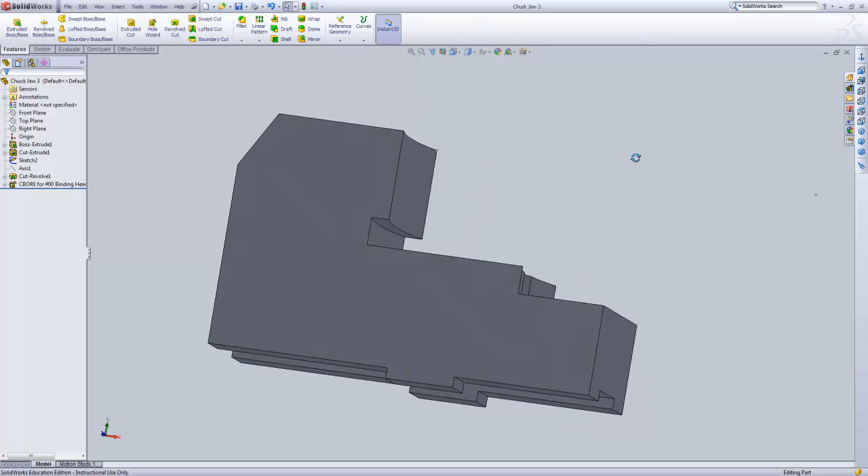This project is the chuck jaw. The chuck jaw has first an outline to extrude, and then a cut on the bottom, two holes, but also these cuts are curved. That's due to its inclusion in an assembly of a chuck.

The most important aspect of a chuck is the axis that it's going to rotate about. That's shown in the diagram by the axis on the far right that has a 4.5-inch radius to it. So that's going to be the trickiest part of what we need to do.

So we will go to a new part and make sure that it is in inches. So we'll go to inch pound second, and we'll make sure that we change it to 3 decimal places.

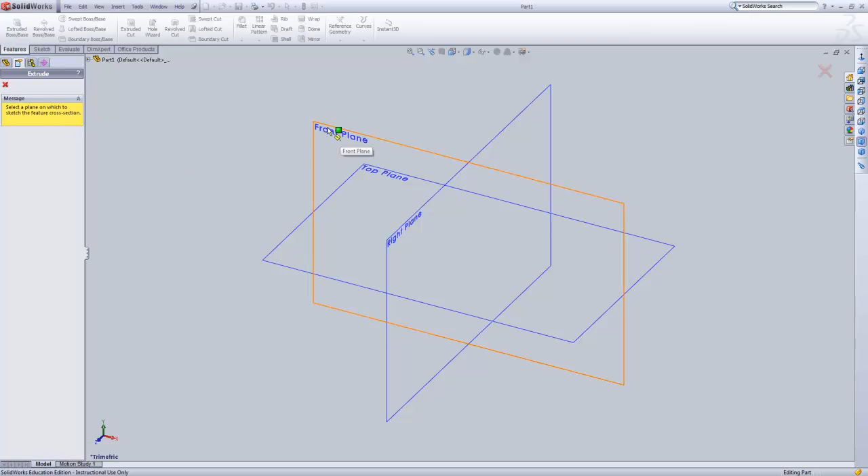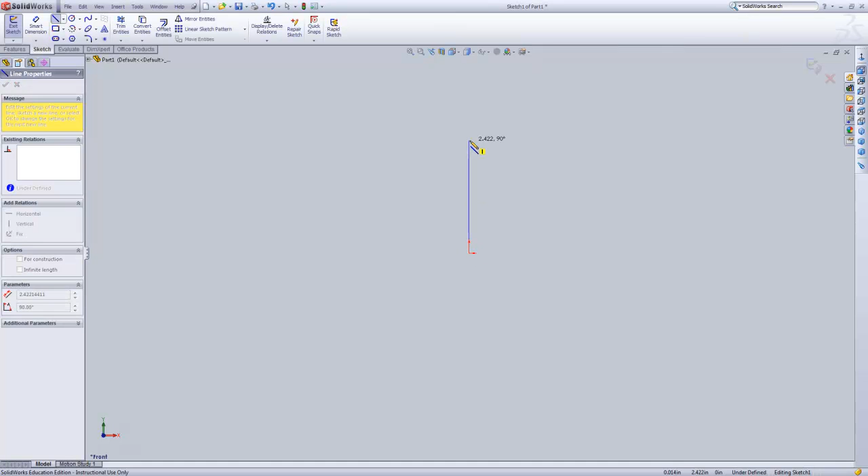So the first thing we're going to do is make the overall block outline. Going to extrude on the front plane, and notice that it is also symmetric, so we're going to use a mid-plane extrusion. I'm going to keep the origin in the lower left, and go up here, over. I'm going to make an overall block so it's easier to see how the cut happens.

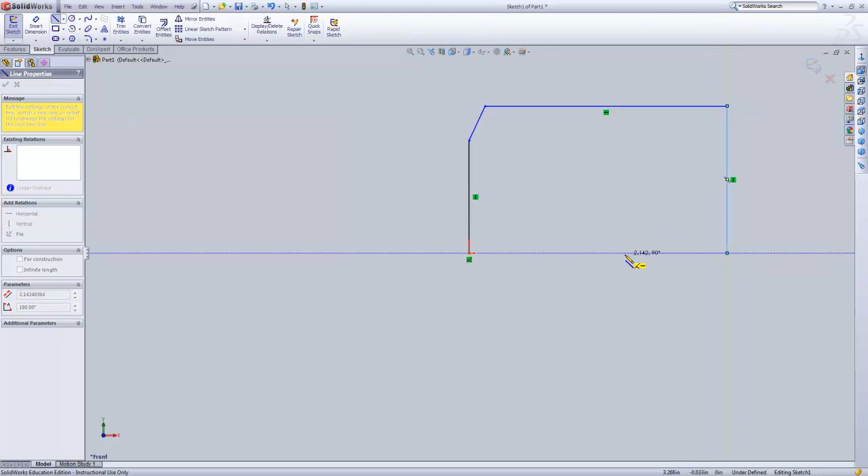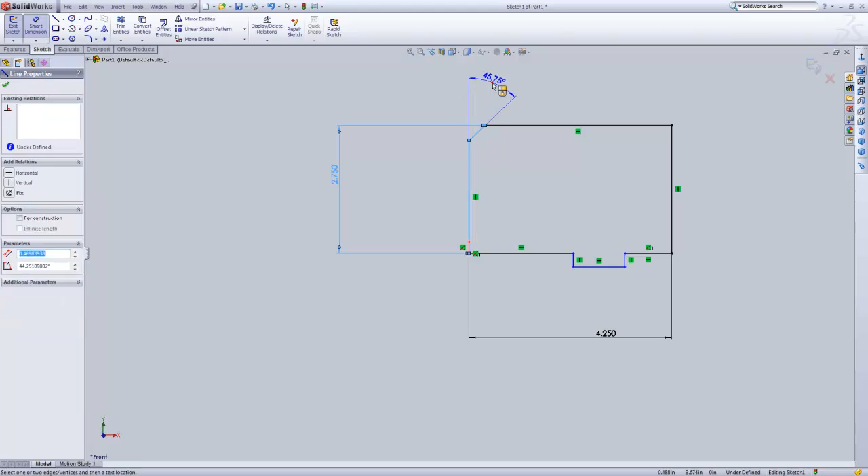Then this just needs to be dimensioned. Give the overall bottom, overall side. That looks 30. And height given is 0.62.

This detail here, I'm going to put 0.75. Oops. Actually it has a tolerance on it to be just under 0.75, so 748. And this is...

Well, now where is this located? Now if we can drag this back and forth, we're going to need to make sure that we have that dimension. That's 1.5 from the right side.

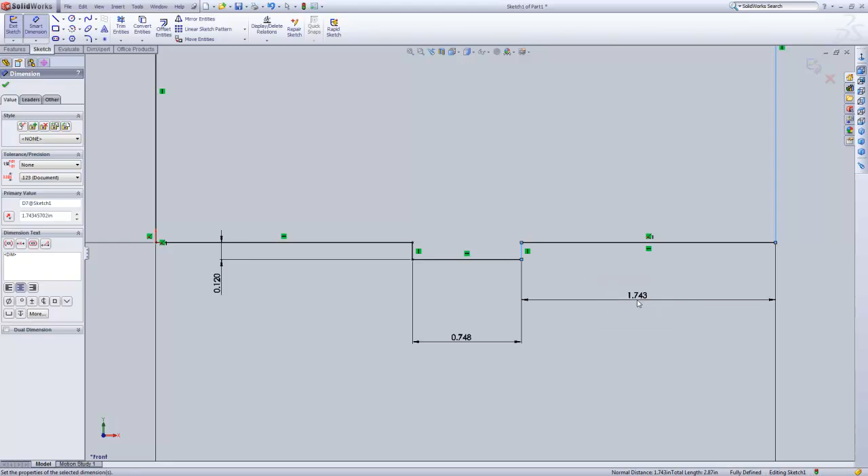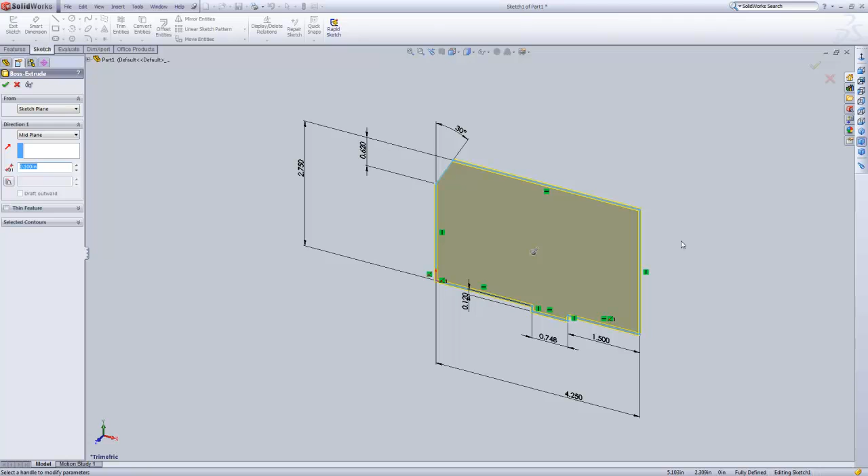And our outline is complete. Again, it's a symmetric part, so we want to use, instead of blind, a mid-plane extrusion. That allows us to extrude on either side of the intended plane. And the overall depth is 1.7. And there's our first block.

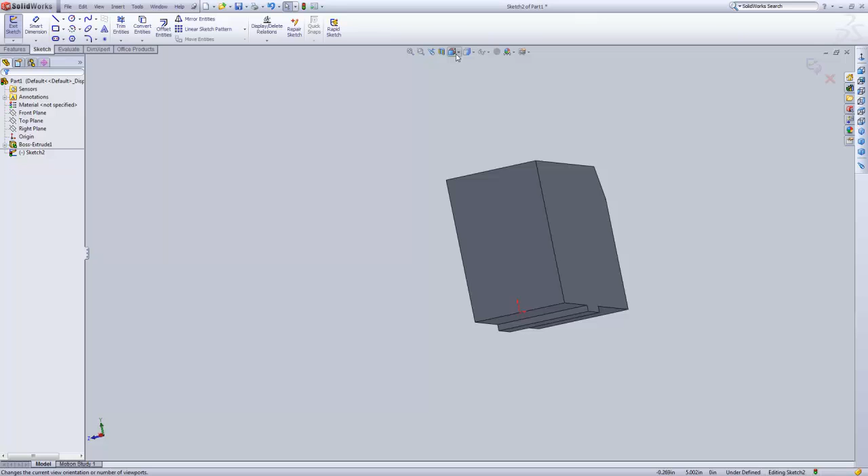Next thing to do is to cut the slot in the bottom. Extruded cut off of that plane. Look at it head on.

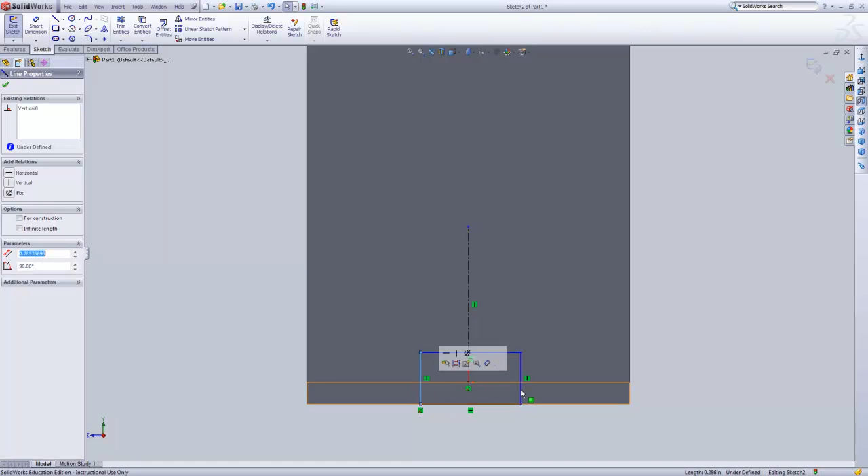I'm going to make sure it's symmetric by putting in a center line, a line to the origin right here. So now, after escaping from that, hold the control key down, hold both sides, hold the center line, click on symmetric, and now these lines will always be symmetric about the center.

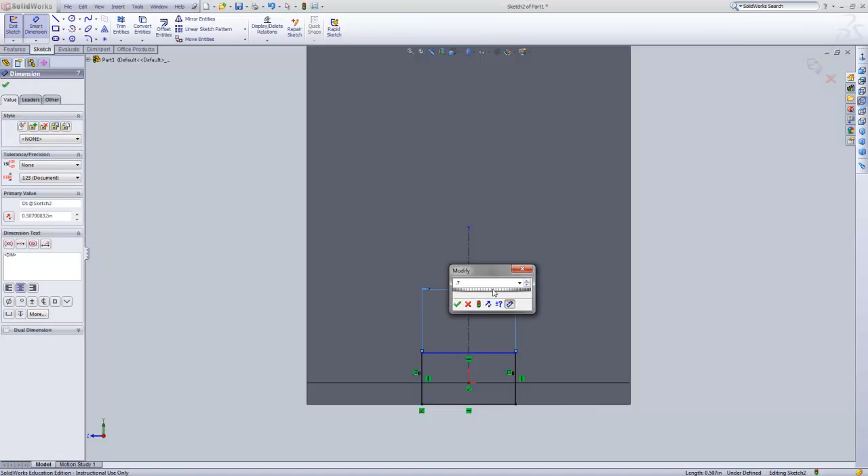I just need to dimension. .752. And then a vertical dimension, actually from the top of the cut to the edge, shown there, 120 thousandths.

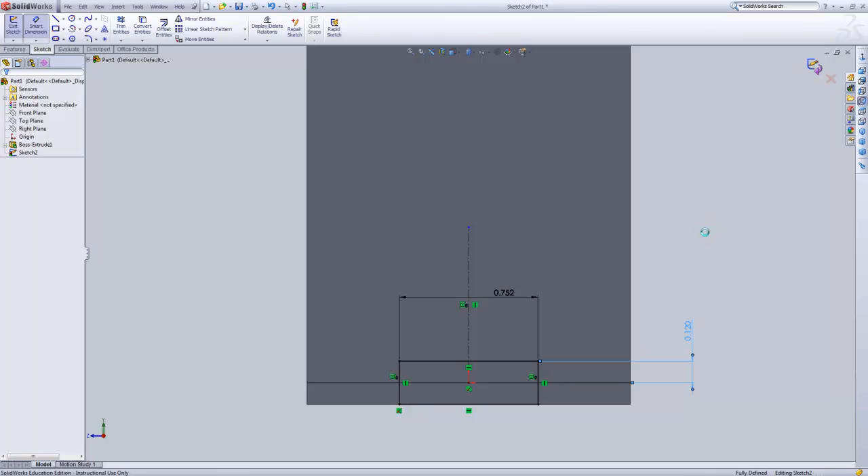That does it there, and we're going to go all the way through. And there's our slot.

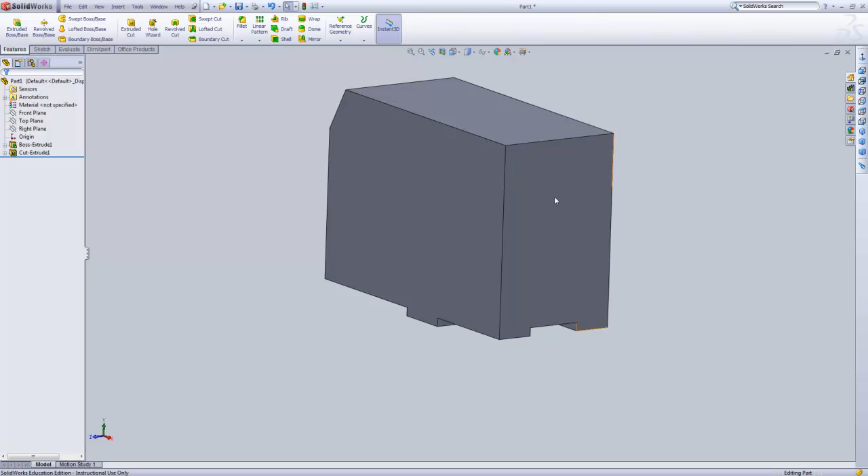Now the next couple of features are going to be used to set up the cut that has the curves in it. The very top of the diagram, you see that there is a 1.75 inch dimension from this face over to a point right about here.

From there, we have a 4.5 inch radius to some axis out in the middle of nowhere, but that axis is on the middle plane. Again, symmetry is very important.

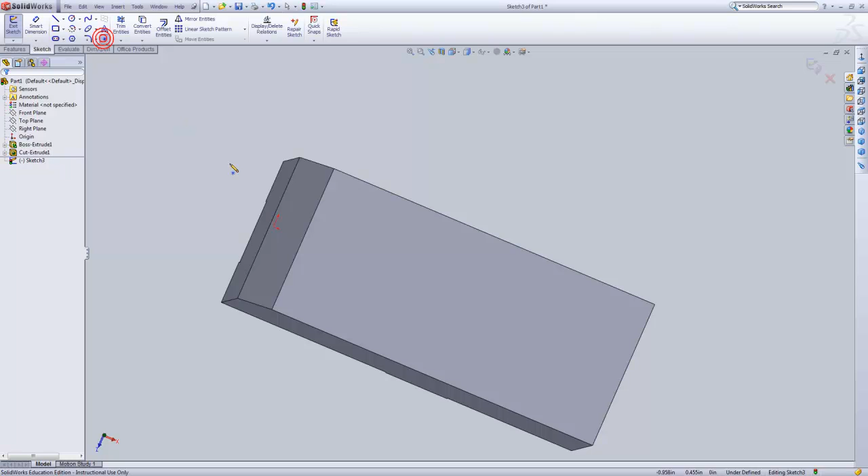So what I'm going to do is I'm going to just create a sketch. You go in sketch mode, put this plane, and I'm going to simply make a point. I'm going to put this point right here, on that edge, and then I'm going to dimension from that edge to here, 1.75.

Then I'm going to make another point, and we'll put that point out in space over here. I'm going to hold the control key down, that point selected, and I want to make sure that that point is aligned with the front plane. Escape out of point making. There, I'm going to select the point, align it with the front plane, make sure it's coincident, so now I know it's always going to be on that middle plane there.

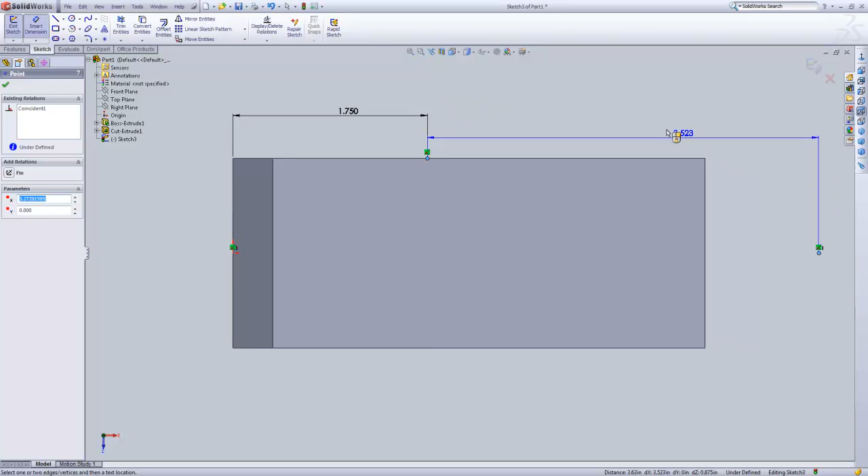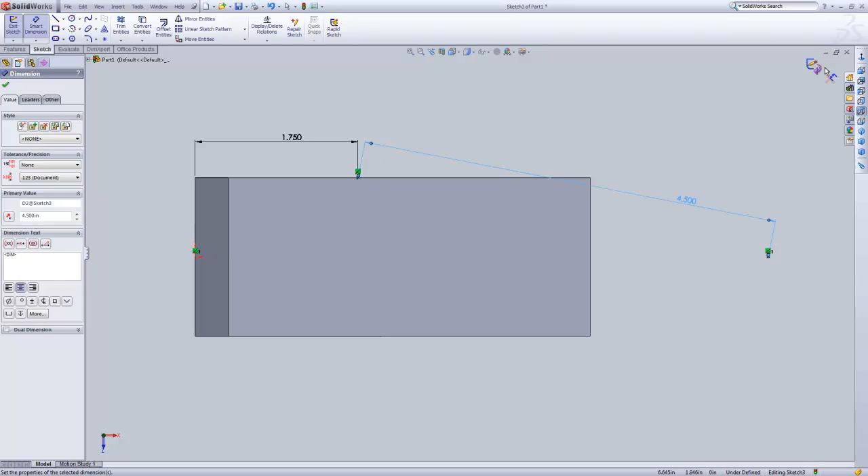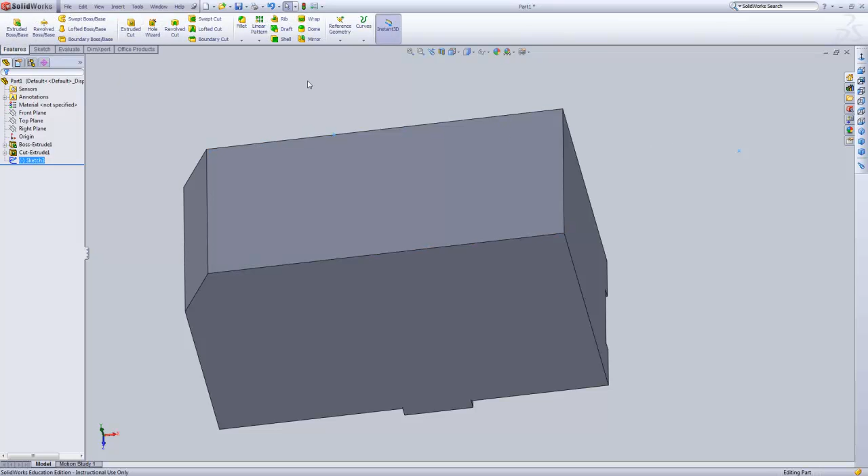Now this axis of rotation in a lathe or a drill or whatever, something that requires a chuck to keep it on the axis. That axis is so important, I'm going to create a brand new axis right here so that it can be used for whoever is going to assemble these parts.

I'm going to go reference geometry, axis, and I need to select various features, whether it's in sketches or edges or whatever, and to define this, I'm going to make sure it's in the front plane. Now it doesn't know exactly where it is. It could be anywhere in that front plane.

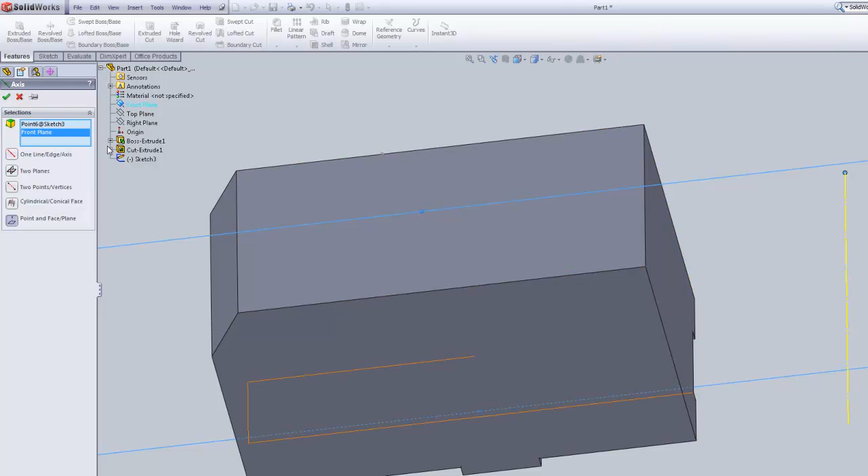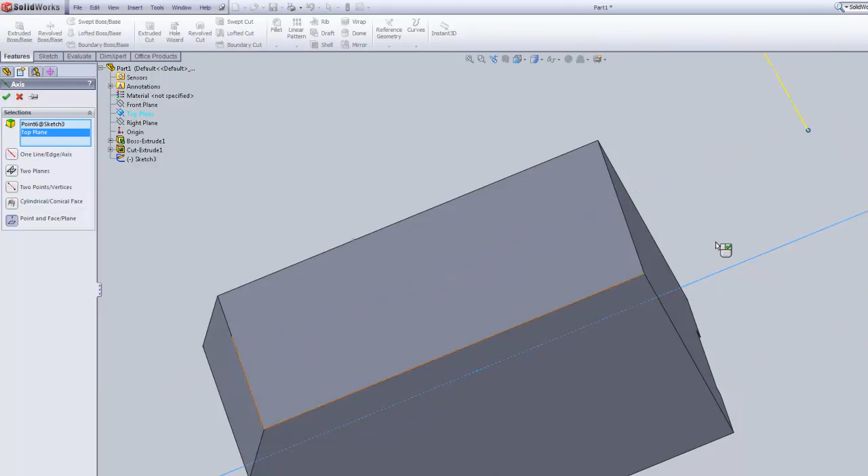It's chosen to be perpendicular to the plane, so it's going to be a little hard. Well, maybe I should just choose the one that it would be perpendicular to—not the right plane, but the top plane instead. There we go. It's perpendicular to that top plane, going through that point, and that's the point and face plane.

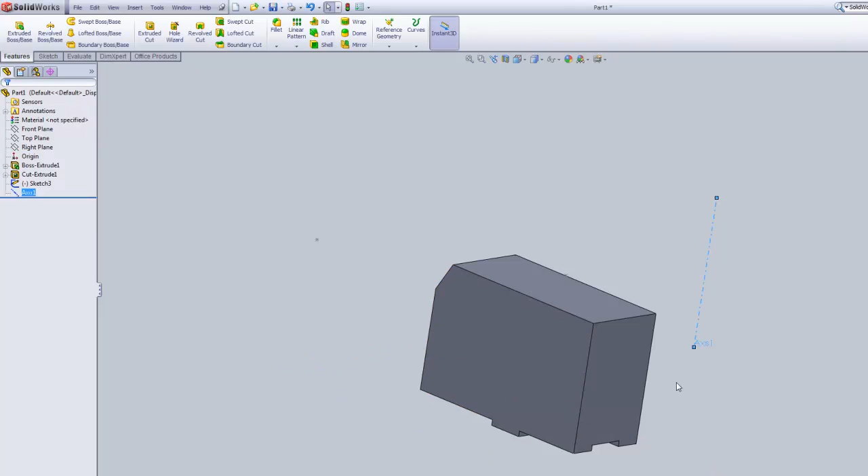Okay, now that I've got my axis, the rest of this is easy. I'm going to make a revolved cut, not an extruded cut, a revolved cut. And I'm going to make sure I use that front plane, that internal middle plane, to do my sketch.

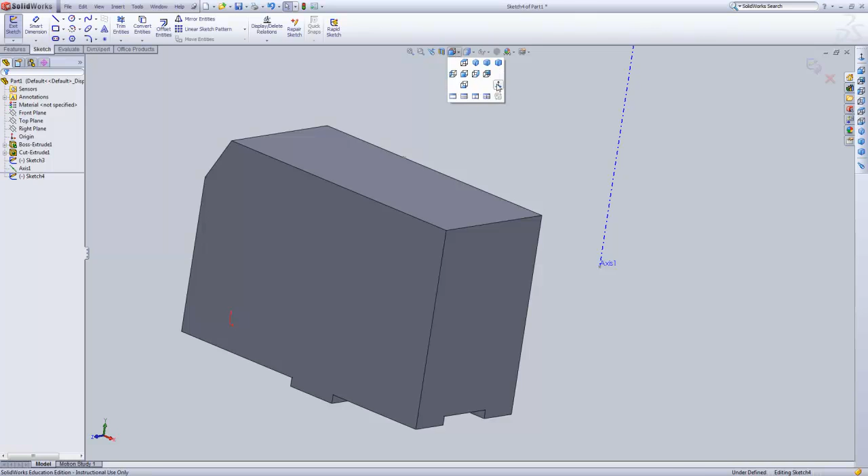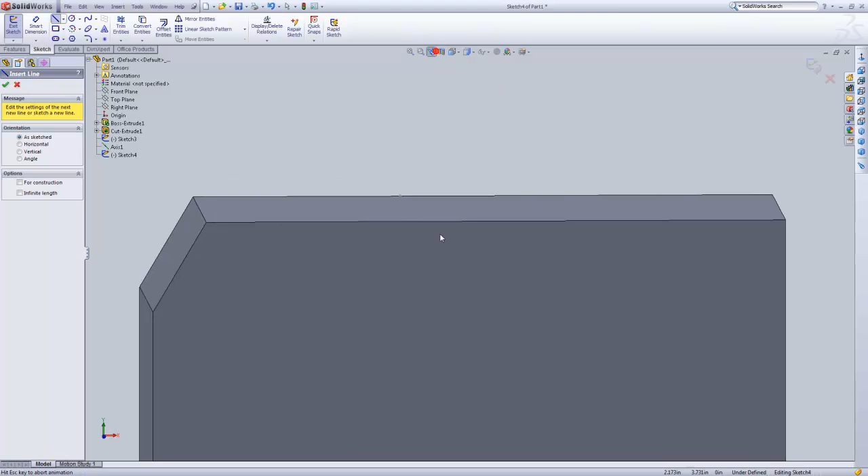And now you can see the outline. I'm going to try not to associate it with that point that I have right there, because that point is on the far plane over here, not on the middle plane. So let's sketch out in space here.

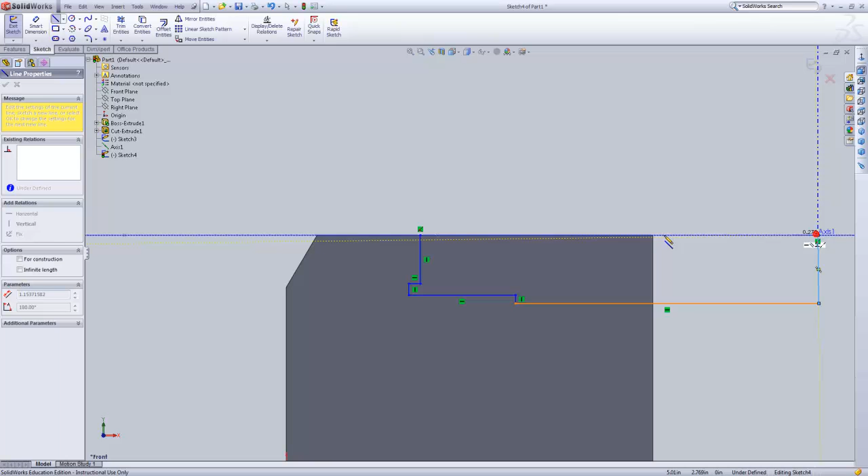I'm going to go all the way to the axis, and I did that to make a closed loop so that the computer knew exactly what I was trying to cut out. I'll make dimensions, going from the bottom up because I made them a little bit small.

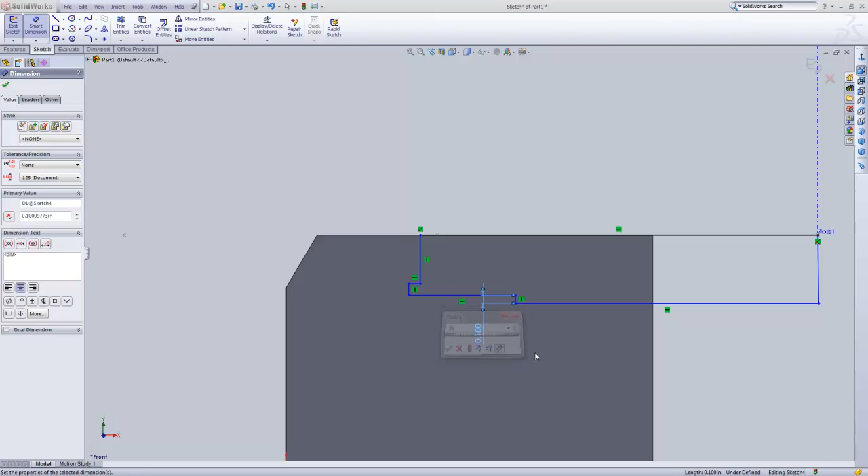So there we go, it's looking a little better. Now I need to make the radial dimensions. This is the 4.5.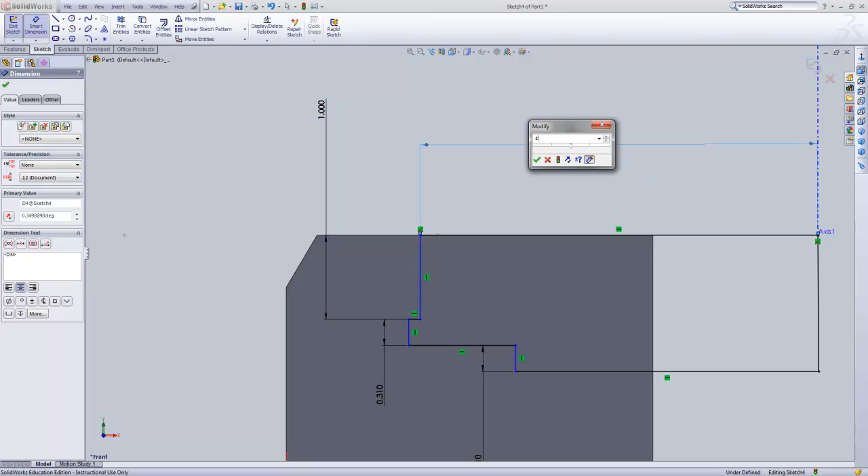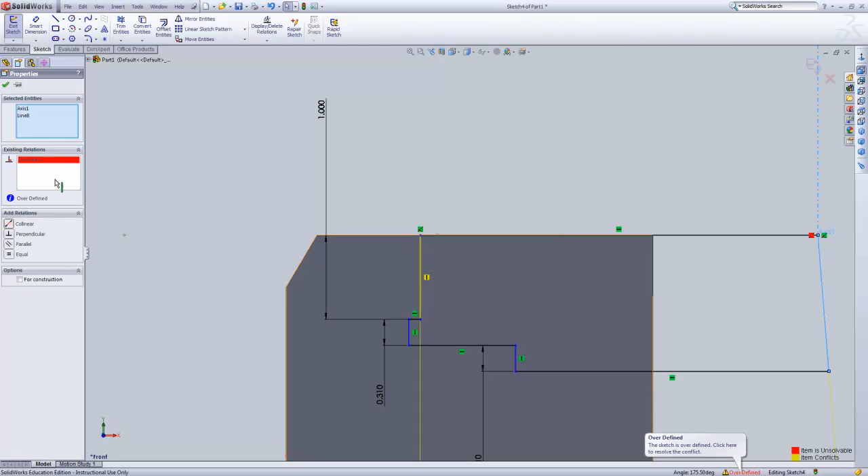Uh-oh, what happened over here? It looks like I did not make this collinear with the axis. That's kind of crucial, so I'm going to go back and make sure that relationship is intact, and I'm going to get rid of this dimension here.

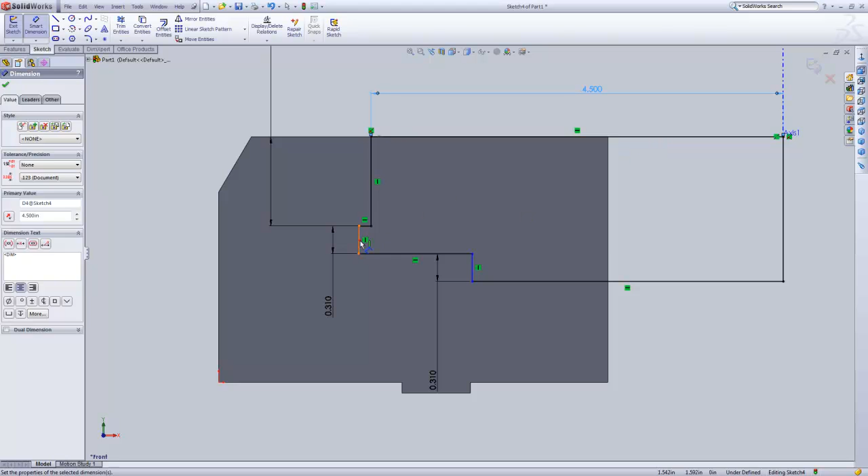It's having a problem. Try this again. Dimension from here to here, right now, here to here, 4.69, from here to here.

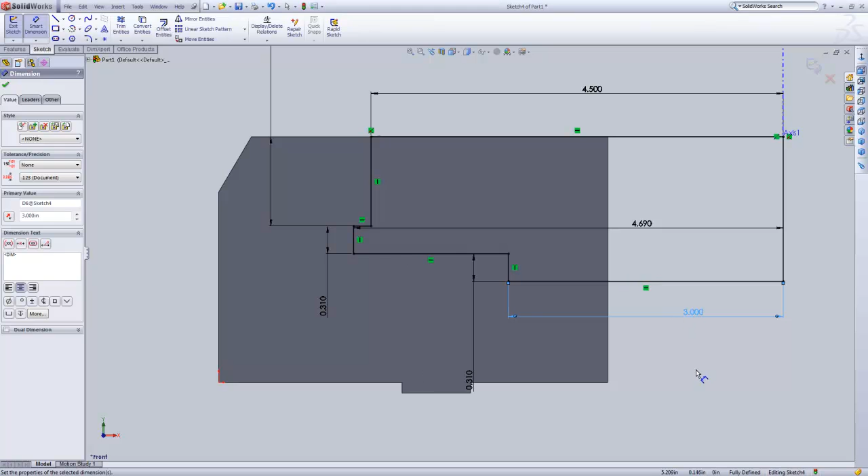Okay, now we are ready to cut. With one exception, we should make a center line coincide with this one so that it knows which line to rotate it on. Not always necessary, but I have to make sure it's there.

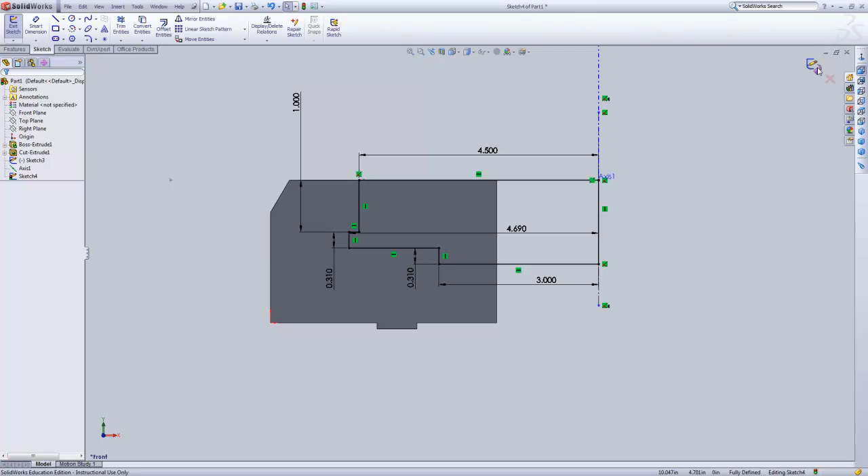It already assumed that Axis1 was the rotational axis, so it's going to take that outline and rotate it about this axis and cut everything in its path. And there is our cut.

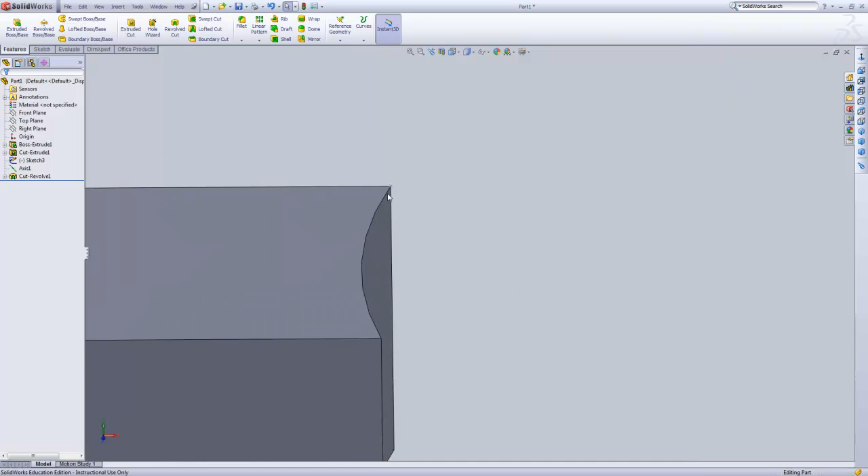Notice how it follows right through that point right there, but it is not a straight cut, it is a curve, and the best way to do it is this revolved cut.

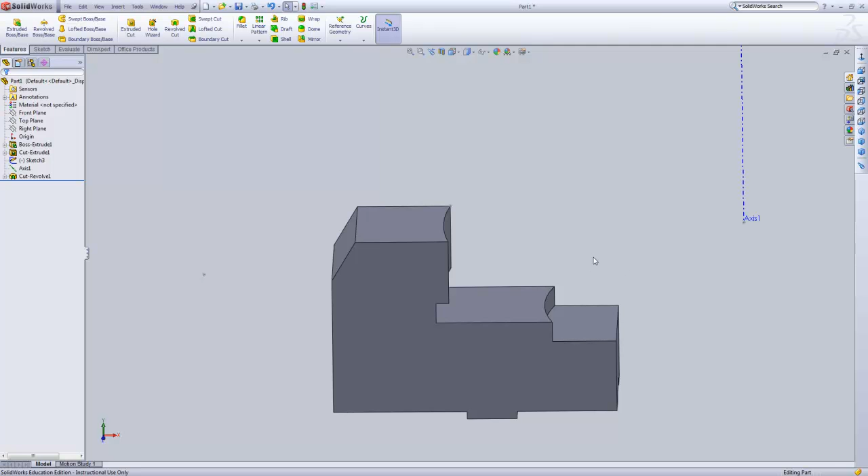Could you cut down from the top with these curves? Absolutely, but then you would need to do 1, 2, 3 separate cuts instead of one cut that made a lot of sense with respect to the actual use of this part.

It makes sense to make this axis anyway because it will be assembled with other parts that will use the same axis. Now, last but not least, we need to make 2 holes.

We will use the Hole Wizard for this, and it will have a simple counterbore, but notice that it will be on 2 levels, this level and this level.

So it comes in as inch, and we've got custom sizing all ready to go here, and it is given that we have a through hole of 1/2 inch and counterbore diameter 3/4 of an inch, and that counterbore goes in 310 thousandths.

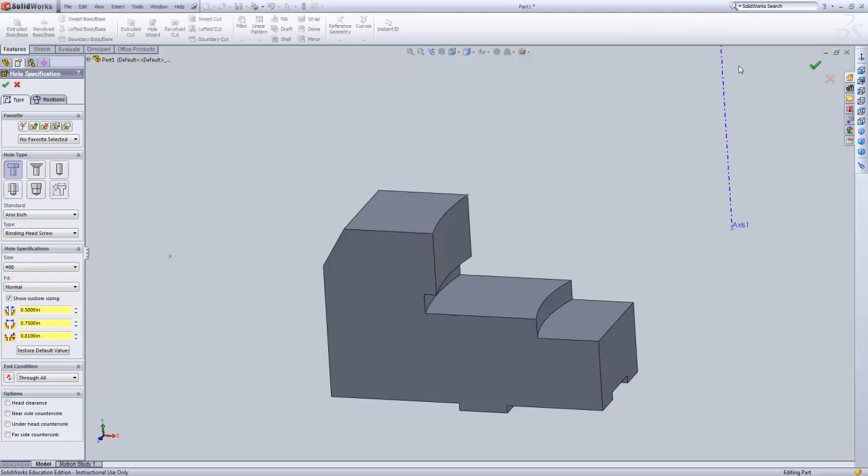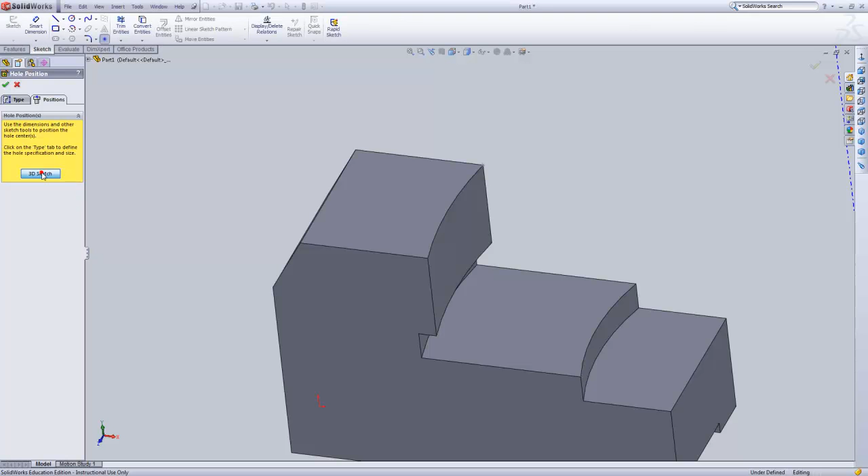And now we need to know its positions. Because it's on 2 different levels that we're going to place this, we want to use 3D sketch. Now, one more thing I caution is not to place those points too close to where you actually want them. You want to place them on that surface and then move them to the right locations. Not as crucial here, but it can cause problems in other places.

So I'm going to put one here and one here. Now we want to escape out of making points, and we want to align these points onto the front plane. Click on plane. Same thing with this one. Hold the control key, click on front plane, and relation will be on plane.

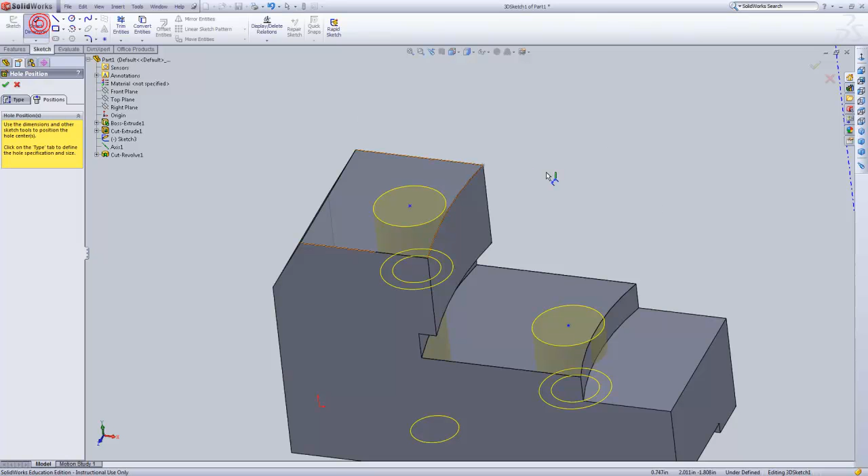Now all we need to do is dimension them from the front plane. Now that we're in 3D sketch, the dimensioning scheme's a little bit funkier. We need to make sure that we choose off the plane to that point. And then 0.75.

And we try to go from this point to this point, it will only give us this slanted situation. We won't be able to change that.

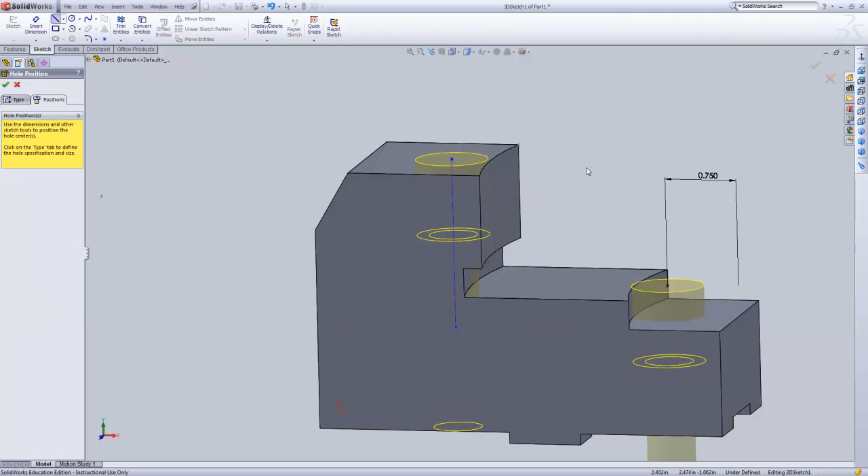So we can't do it exactly as the drawing tells us to, but we could make a center line that goes from this point down. And then we can make our dimension from that line to that point, and make it 2.5 as shown on the diagram. And now we're all set.

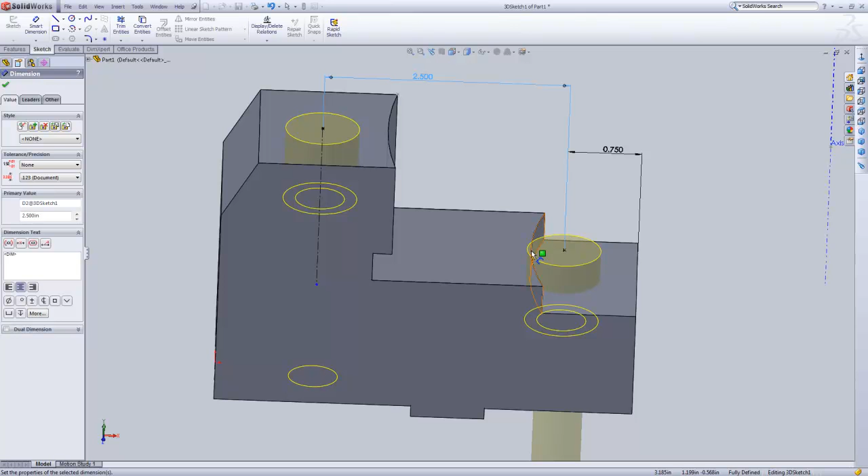Now notice how this hole does just barely graze this surface, but that's definitely the surface that this is intended to be on.

So here is our final chuck jaw. Notice how it only took 4 major features and 2 minor features, or at least a feature and a sketch.

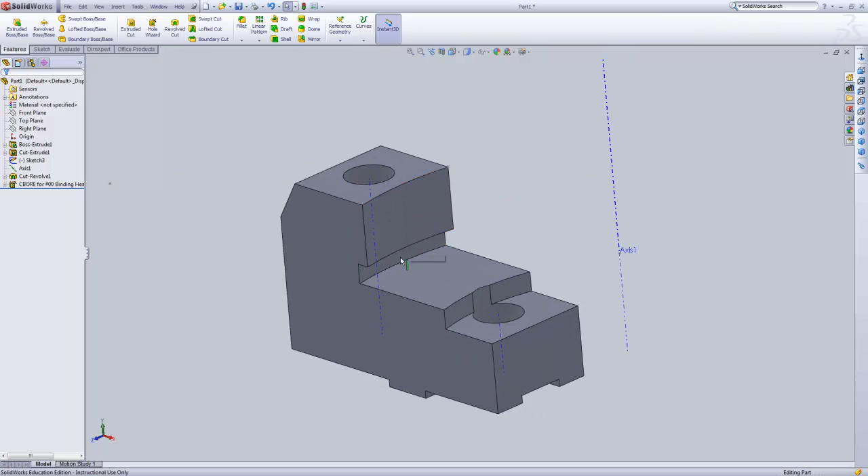We were able to complete this complex geometry here and let it be reflective of the design intent, as there's an axis here that all the other parts will have to go around, and we'll want to be able to reference this and assemble them in that kind of fashion.

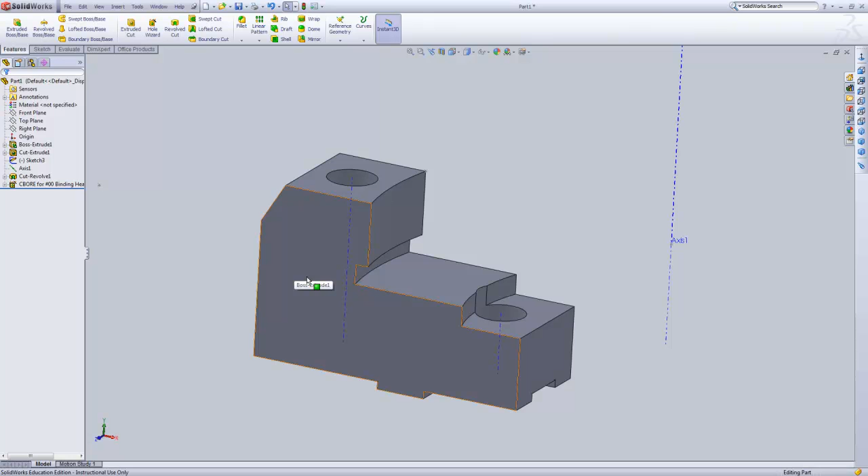So we were able to capture design intent and create this somewhat complex geometry in one revolved cut. We also used 3D sketch to create these 2 holes, and the usual extruded boss, base, and cuts for the other 2 features.